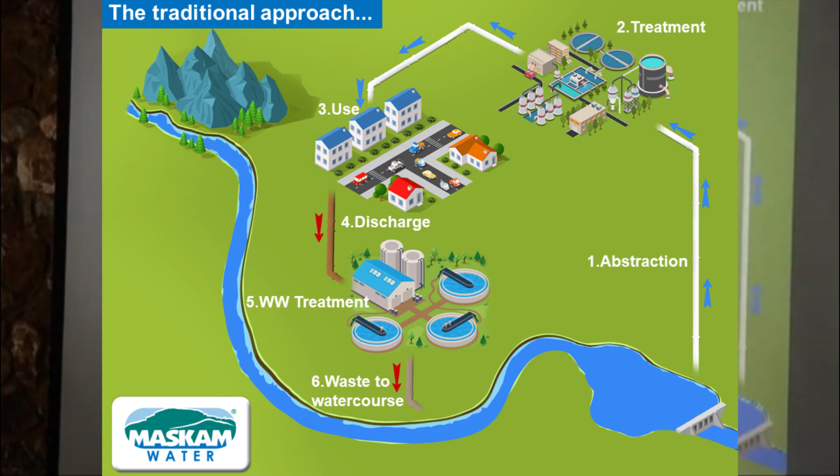Let me show you something. First of all, let's look at our water cycle. We have our catchment area, which normally the water ends up in a dam somewhere. We abstract from that dam, we put it through a filtration system, we use it, we discharge it through an overloaded municipal wastewater treatment works, and we pollute our water course.

Now this is very important. Remember what I said earlier, when you flush it, it's gone, it's out of sight, it's not your problem? Look what's happening here. It's coming back to be your problem because you're feeding it into water courses that feed your drinking water. I do apologize for the sensitive ears, but you're literally pooing in your own drinking water.

When you discharge your wastewater to a non-functional or overloaded municipal wastewater treatment work, you're pooing in your own drinking water. There's no nice way to say it. Okay, now, but in my town it's different because in my town this wastewater system discharged below the dam wall. Oh, beautiful, you just feed it to your neighbor. Come on, where's Ubuntu here? That's what we end up doing.

At a previous meeting I said, okay, everybody by a show of hands who believes eating healthy is good. And just about everybody put up their hands, and the next thing I asked is, who likes some nice grapes every now and again? And everybody put up their hands again. I said, now you think if you flush a problem in Gauteng, it's going to go down the Vaal River, it's not your problem? Guess what?

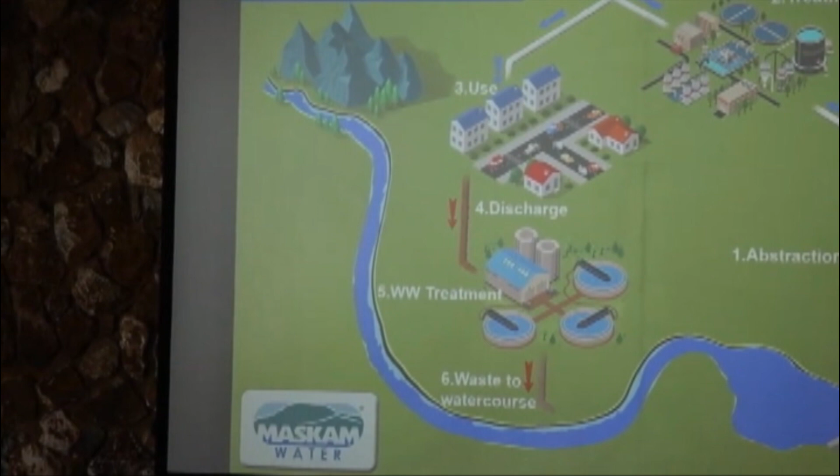But there's another little problem here. The other problem is if you look at the carbon footprint. Again, not many people think that water has a carbon footprint, okay? It's a natural thing. How can that have a carbon footprint? Would you agree? Well, the problem is, if you're in Pretoria and you get water from the Vaal Dam, what's the figure? About 60% of Pretoria's water coming from the Vaal, I think.

Well, if you look there, that's 124 kilometers line of sight. So you're looking at about 150, 200 kilometers of pipeline that you need to pump that water. But your problem is from here to there is a 300-meter rise. You need 30 bars of pressure to lift the water to Joburg before you can flow it down to Pretoria. 30 bars of pressure, to give you an idea, your irrigation system at home runs on 3 bars. Your average geyser runs at 4 bars.

We're talking 30 bars here to lift that water to Joburg before you can get it to Pretoria. What is your carbon footprint on that pipeline? What is your carbon footprint on those pumps? What's your carbon footprint on the electricity that you use for that? Now we're not even talking purification and all the other stuff that goes with it. So your cost and your carbon footprint becomes huge in cases like this.

So what we now do is we start thinking a little bit different. When we do on-site reuse, so whatever wastewater we have here, we treat on-site, we take it back. We now start talking about increased water resilience. And remember, every time you flush a toilet and you treat it, you have water to flush the toilet again, no matter whether the municipal water is on or off.

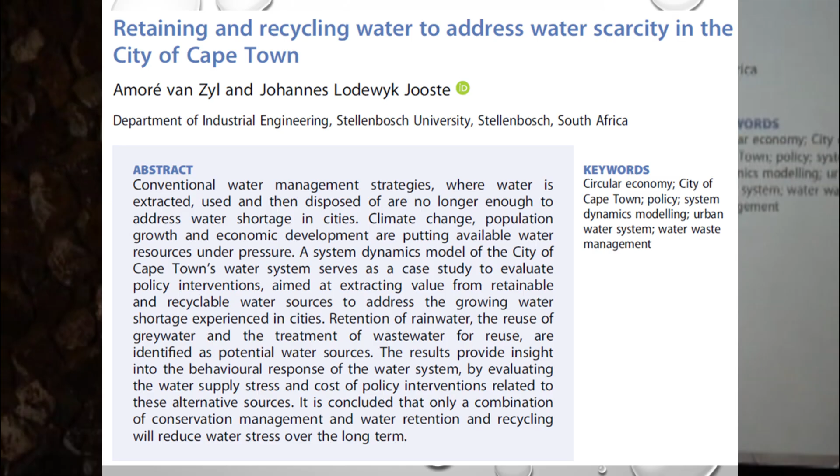In 2020, the University of Stellenbosch, and I'm not going to try to give you all the details, but in 2020, the University of Stellenbosch said, retaining and recycling water to address water scarcity in the city of Cape Town. They looked at all possible water sources taking Cape Town into the future. They excluded desalination because of the cost.

And there's this whole document. If anybody wants it, we can email it to you, talking about the benefits and how you can move forward and how recycling will save the day and for Cape Town become a water source for the future. Exactly the same thing applies here.

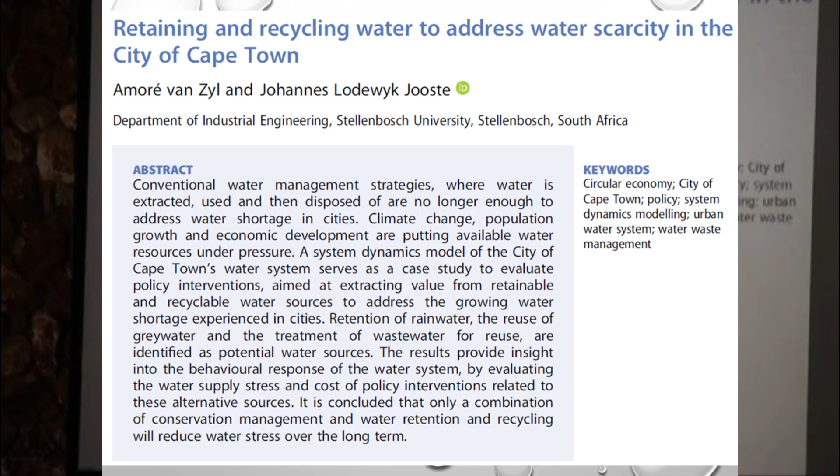I'm going to show you one technology. There's not enough time to go through different technologies. Yes, it is our technology. I'm a little bit biased here, okay? The fusion system, which is an underground installed wastewater treatment plant. And it will recycle your water on site for you.

Comes standard with a panel that has an early warning system. So if anything goes wrong with the system, it will immediately warn you before you have a pollution problem. And these early warning systems, I think, are critical. Because something can go wrong, it's man-made. But you need to know when things go wrong.

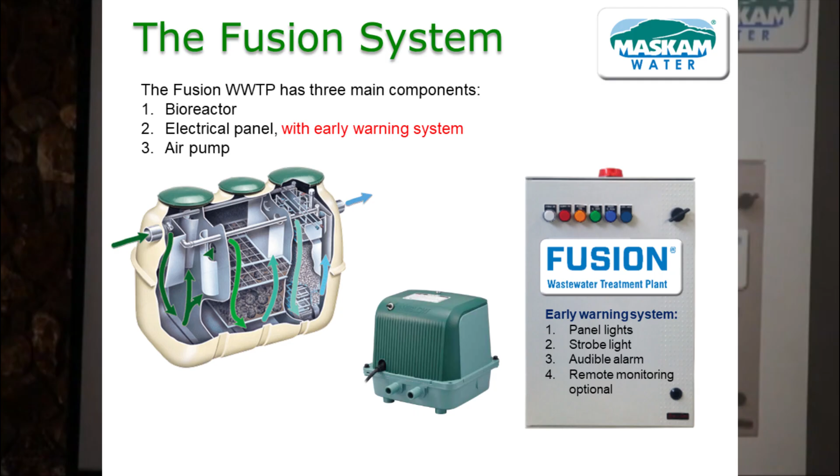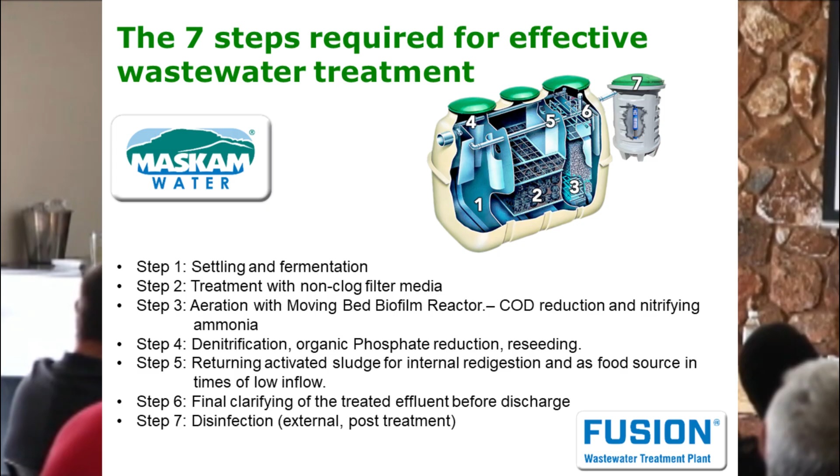These 7 steps, I'm not going through them in detail. I can tell you that quite a number of wastewater treatment plants in South Africa, I almost want to say 90% of the small plants, stop at stage number 3. These stages are missing. And you can take it with anything, even if you bake something at home, take out half your ingredients of the recipe and see if that recipe is going to work. There's certain things that are needed for a wastewater treatment plant to work.

So before you look at the price, because that's what most people do, look at what you get for the price. Because I've seen that so often. People buying cheap and then having to remove it again later. I'm not going to spend time on the technical side of it.

Just keep in mind, without disinfection, there are at least 6 steps of treatment that need to happen to get to the water quality that by law you need to get to if you want to use or discharge this water. Okay? But at the same time, again, for pollution, otherwise you end up pooing again in your drinking water. Case studies.

Where do you think is the highest risk installation you can have in terms of if your system fails, you will have big problems? Where do you think is the highest risk installation? Let me see if I can get 2 or 3 people to answer that question for me. No, you're not allowed to. You know the answer. Come on. You know the answer too, Nora, you're not allowed to answer. And so does Andries and Arno. I'm listening, sir. Close to any natural water system, yes. But if you step it up a bit more, where's the highest risk?

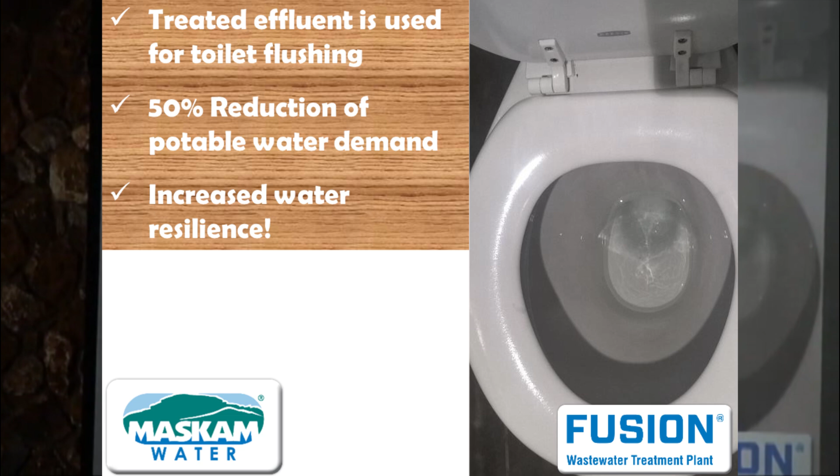And we've cut the water demand by 50%. Remember I said for domestic toilet flush is about 30%. Here we're talking about the commercial building where toilet flush can be up to 90%. In this case it's 50% because they have showers and stuff as well. So you've just cut your water bill by half. But you have water resilience, you always have toilet flush water.

For 6 years going now, I think the case study speaks for itself. You can do it in the city, you can make a positive difference. And that's why today's theme is talking solutions, because we hear so much about the problems out in the media already. Let's talk solutions.

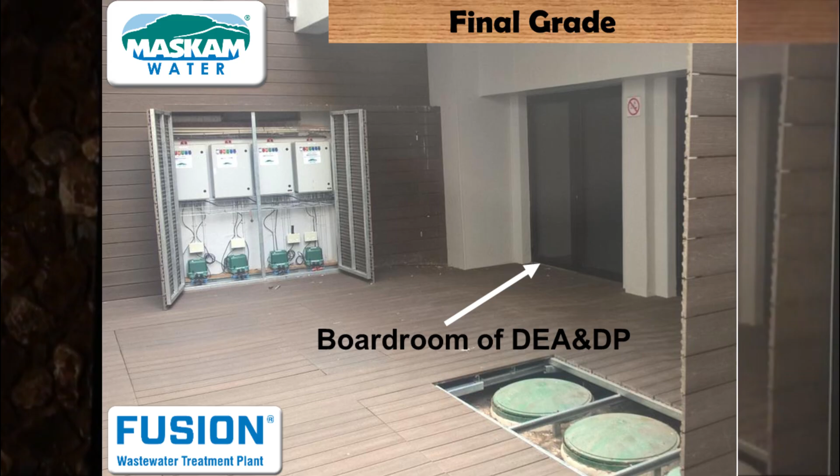This is on a small building. You can see how nicely it blends in with the gardens. There's your treated effluent again. Your air pump. Now the air pump, going back a little bit, there's your air pumps there that's supplying. We had to put in 4 small plants because we physically had to carry them through the building. We couldn't put one big plant in because it just wouldn't fit. But that again is the beauty of having a Lego set. You can pick what's needed. So hiding that air pump there in the garden, we use the false rock.

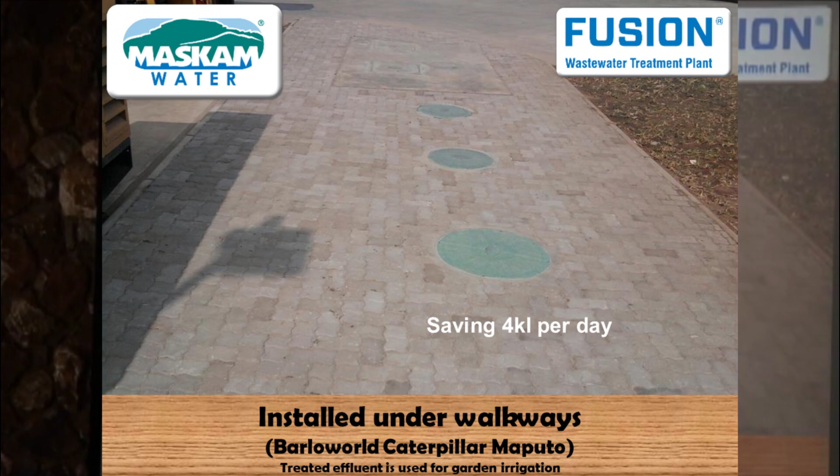In the walkway, in the paving, if you want to drive over it, you've got to do a proper slab. I know Dries has done one where people drive over it in the driveway feeding to a hotel. Unfortunately, Dries, I don't have that photo in the slideshow, but that is also possible. Hospitality industry feeds into the fusion. They use the water for irrigation purposes. There is farms, houses at the farms.

Curro School, Bloemfontein. Again, you can see the treated effluent. They're using that for the sports field irrigation. But the beauty, now we start talking modular systems, because this was designed for a school having a maximum of 600 learners. So then the school grew, they're just over 800 learners now, so the wastewater treatment plant is too small. Oh, big problem. Nope.

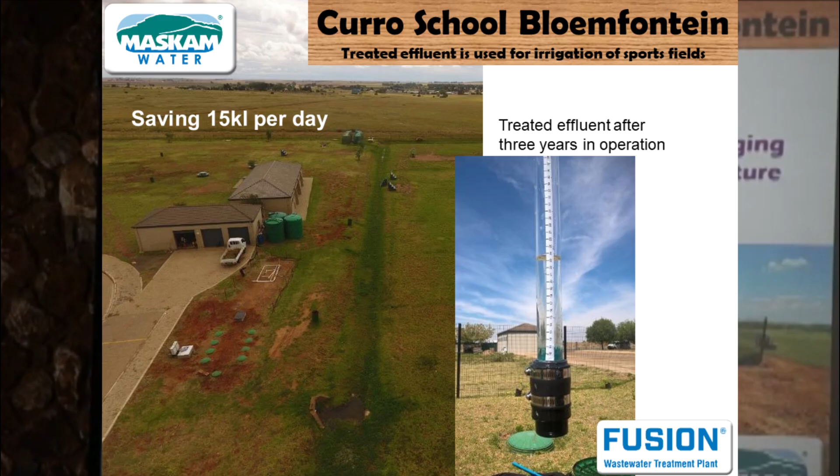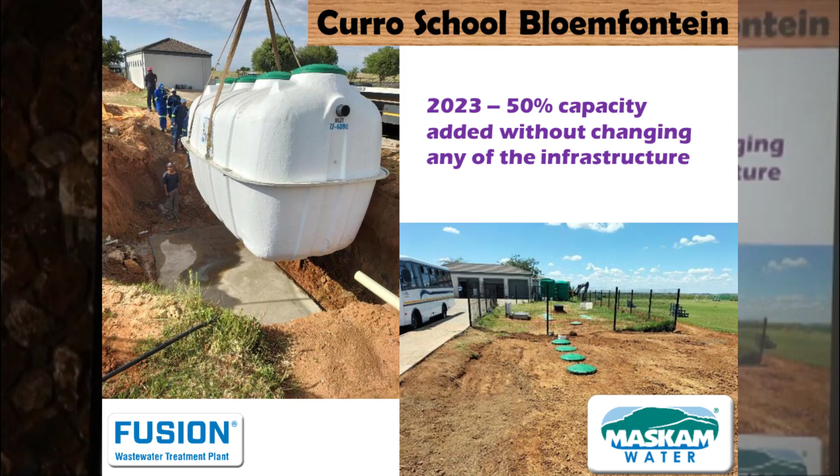We just dropped in number 3. And now they can go up to 900 learners. When they go above 900, we drop in number 4. And so we can expand as the demand of the site expands. Isn't that beautiful? These are mostly Dries installations.

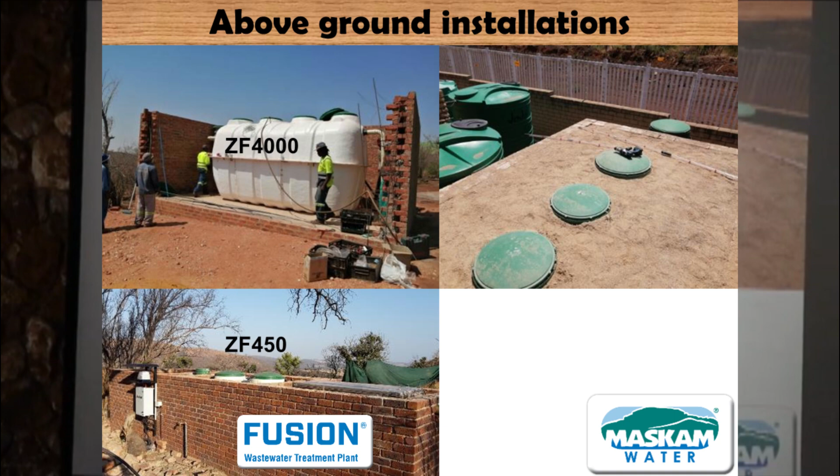They've been doing this in Gauteng since 2012. So these are all installations that Dries have done above ground. Some of them are in Mpumalanga, some are here, not very far from here in fact.

Then if we look at bigger developments, this one is in Katima Mulilo, Namibia. Each color is a different phase. So there is phase 1 coming in. They've got 2 phases up and running now. These ones are now up and running, and these phases will still come in.

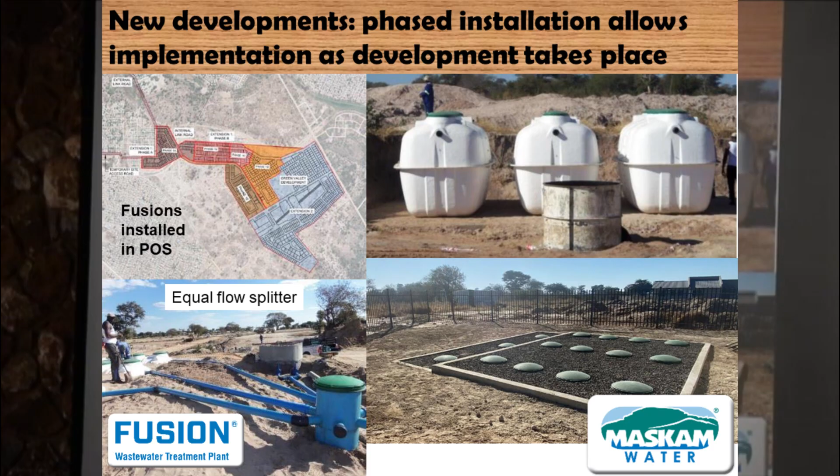So even within the development, rather than having a central sewer system at a huge cost and pumping stations, because it's relatively flat there, they decentralize within the development, and each phase will get their own set of treatment plants, and they will reuse the water in that phase for irrigation purposes. What a beauty. You literally do clusters as you move along. There you can see the final grade of the system.

This one we did phase 1 in November last year. You can see many more phases to come. Again, this is in KZN, it's typically hilly areas. The EIA experts will now tell you what a nightmare that becomes in terms of, well, some will make a lot of money, so for them it's not a nightmare, but every time you have a waterway crossing or a catchment crossing, the EIAs you need to go through, and the pumping stations to pump it up 50 meters or 100 meters. So in this case, it will be fully decentralized.

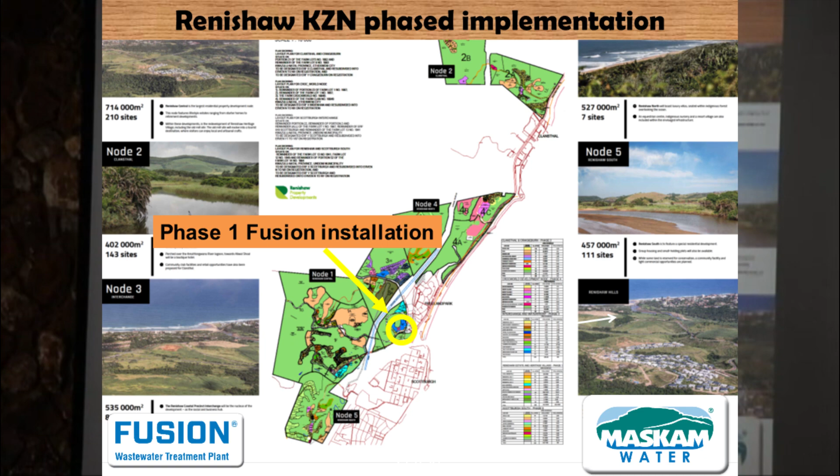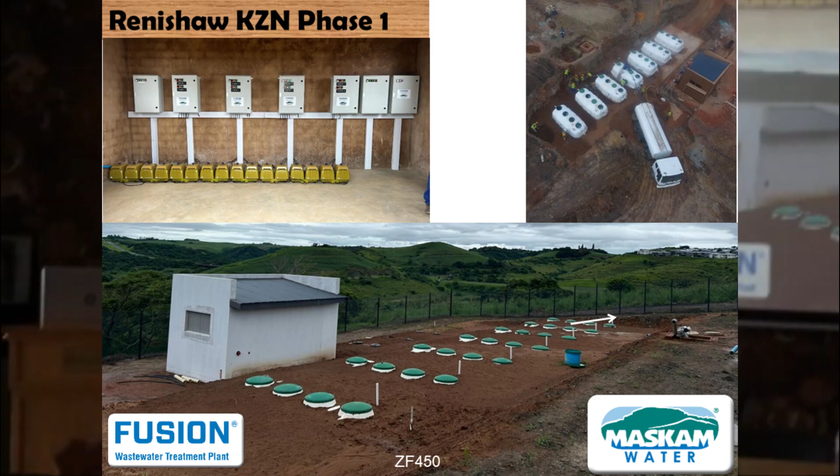In the case of a domestic setup, this will serve 140 houses. It uses 2.5 kilowatts per hour. That's nothing. For 140 houses, 2.5 kilowatts per hour, that's just for the treatment, it excludes pumping back and so forth. It's out of sight, fits in very nicely with your landscape. There are a few more projects like that coming up, and in future we will have some more to show on that. There you can see the 7 tanks during the installation period.

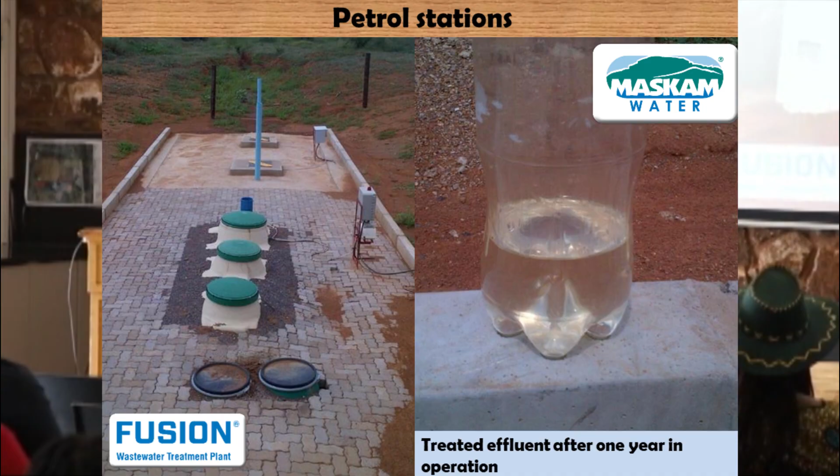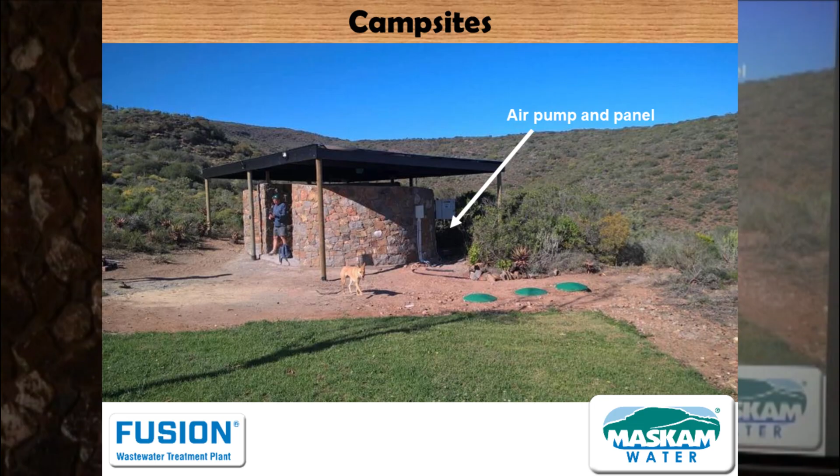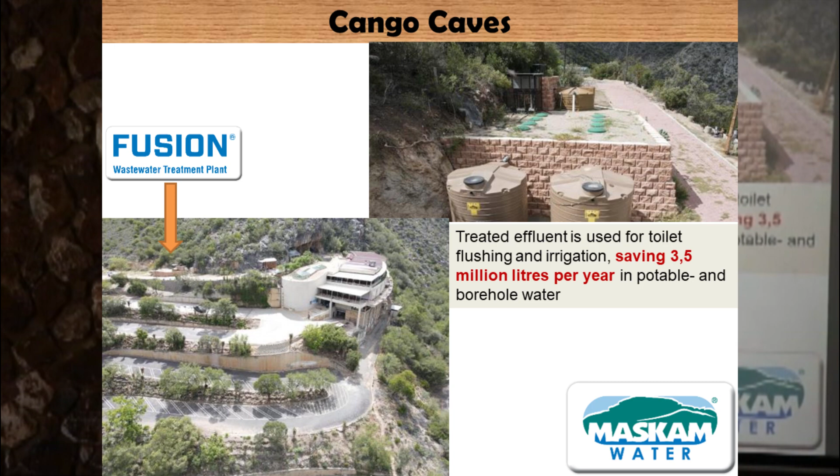Cango Caves making use of this technology, where they pump their wastewater up to that point. It gravity feeds to a lifting station here. They pump it up, treat it, pump it higher up on the mountain and bring it back for toilet flushing and for irrigation. Vrolijkheid Nature Reserve, De Hoop Nature Reserve, when you go on the whale trail, you will have your Fusions there treating your wastewater. There are more nature reserves. There's a botanical garden, a few others as well. We cannot do all of them.

So the case studies are just to show you it is possible in just about any location. Different technologies are better suited for certain locations, but you can do it anyway, and you can recycle 100% of your water for non-drinking. If you want to take it to drinking purposes, then you go through a reverse osmosis system. You will have, depending on the system that you use, anywhere between 25 and 45% waste. So there you do lose water. But it also becomes more expensive.

We are busy with a case now where there is no drinking water. There's no municipal supply. The boreholes can only deliver 8% of the total volume needed. Rainwater harvesting is difficult. It's going to be done, but for 3 months of the year there is no rain. So the only option left is that we take treated effluent back to drinking water standards, and then blend it in with the rainwater and the boreholes to be the total answer. So it's doable, but it is your more expensive solution. Your cheap solution is to use that for non-drinking purposes and save your expensive water for drinking, for showering, for human contact.

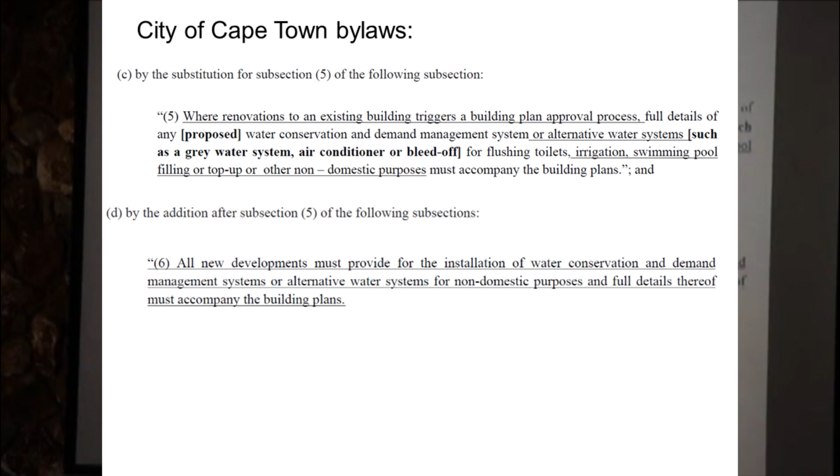City of Cape Town already in 2018 bylaws said renovations and new developments must make use of water conservation and demand management systems or alternative water systems for non-drinking purposes. It's already by law in Cape Town. And I stand to be corrected, but I believe that Ekurhuleni is also coming to a point where they said new developments must do their own wastewater treatment because they can't do it anymore. So these things are changing. Municipalities used to resist this. They don't really have an option now but to adopt this.

Green Cape has done a study also in 2020 promoting on-site treatment and reuse. I may be in trouble for what I'm going to say now, but I'm not known to be scared of trouble. Green Cape, their purpose is to promote green technology. Started up and funded by the Western Cape government and City of Cape Town. Now these are private funders as well. I couldn't quite get Green Cape to buy into this thing. They did a lot of other green stuff, but this wastewater recycling thing, they didn't like that idea. Until I went to show them the case study at Department of Environmental Affairs. 3 months later, they issued this paper, because then they saw in proof what is possible.

Another study by them was the Cango Caves. You can read up on it on the website. They actually give you the numbers. And this is the first property where we did on-site wastewater treatment, August of 2010. The beauty is they're moving that house now. They've broken it down last year, they're moving it. They're taking out the Fusion, they're moving it with. So there's some green material.

Also going to the Solar Impulse Foundation. There's only 2 companies in Africa that are listed with the Solar Impulse. This is one of them. And to list there's a set of criteria, and one of them is you must already be in commercial operation. It's not a trial or a design or a test phase, it must already be commercially accepted.

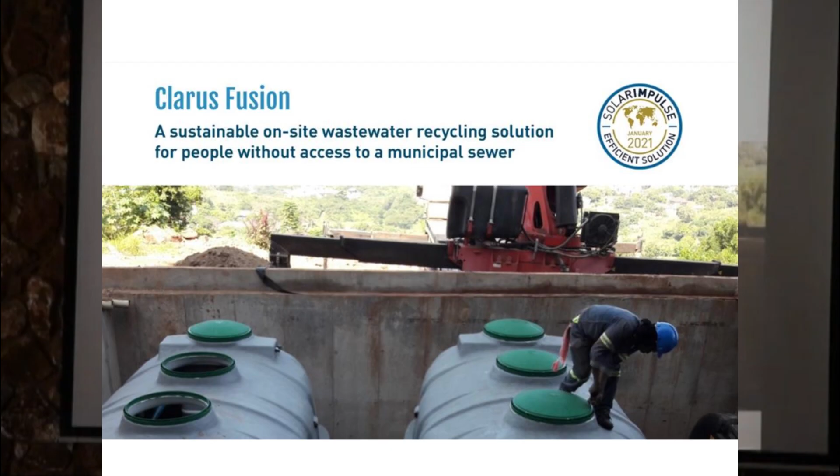Then when we look at on-site wastewater, I'm not going to spend time on that, but we speak to 13 of the 17 SDGs. Not all 13 necessarily on the same site, but we speak to 13 of the 17 SDGs. Now, to all the corporates sitting here and all the consultants to corporates, if you want to increase your SDG score, have a look at this. This is a way to do it.

Now, you can take it one step further. If you're corporate, you need to spend your corporate responsibilities. You need to spend money in the communities. When you spend money in the community, you start talking about no poverty, because people can use the water to grow food. You talk about zero hunger. You talk about gender equality. You talk about health. How do you talk about health when you're talking wastewater? It's very simple. Kids don't play in sewage contaminated soil anymore because you give them proper sanitation.

So when you fund something like this for a community, you score SDGs, but you also have your points for your community responsibility. So it's a double win yet again. And lastly, this is specific to our company. If you look at partnerships, the way we do it is we partner with local installers and local maintenance people. So we create local wealth, build a local economy. And that's where the partnerships come in.

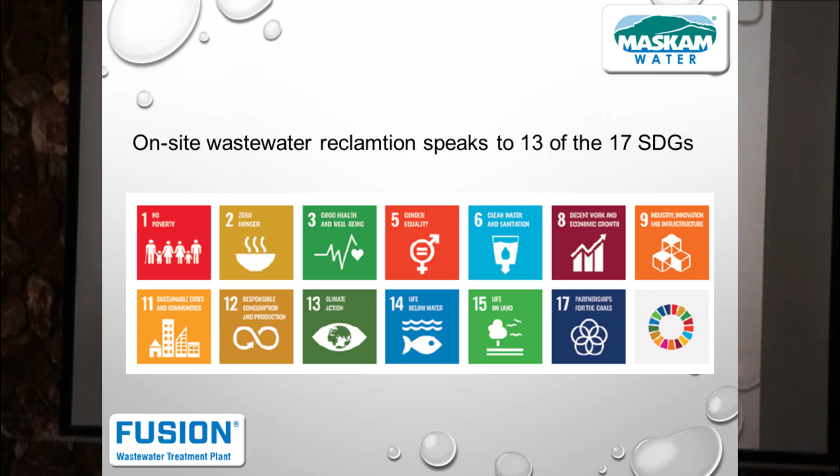For those of you who say, yes, I'd like to do this, but it's too expensive, I don't have 100 or 200 or 5 million, whatever the case may be, to spend on this intervention, it can be financed. We're working with Capital Box there. So you can finance it, and your saving in buying water can carry your installment. So you're cash flow neutral until your investment is paid off, and then you're cash flow positive. So you can get involved in this intervention without having to fork out the big money that you don't have.

There is also a possibility of rentals. That's a bit more strict, but we have companies that don't want to buy the equipment, they don't want it on their books, but they will rather have the operational expense of a rental. It is also possible through the financing model.

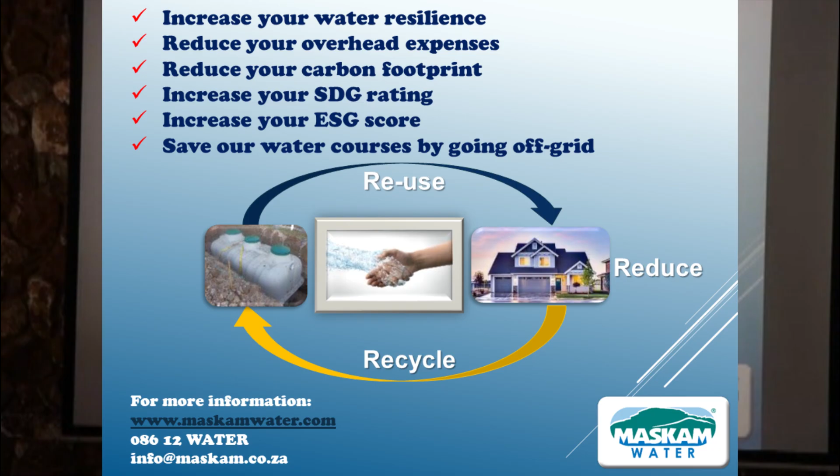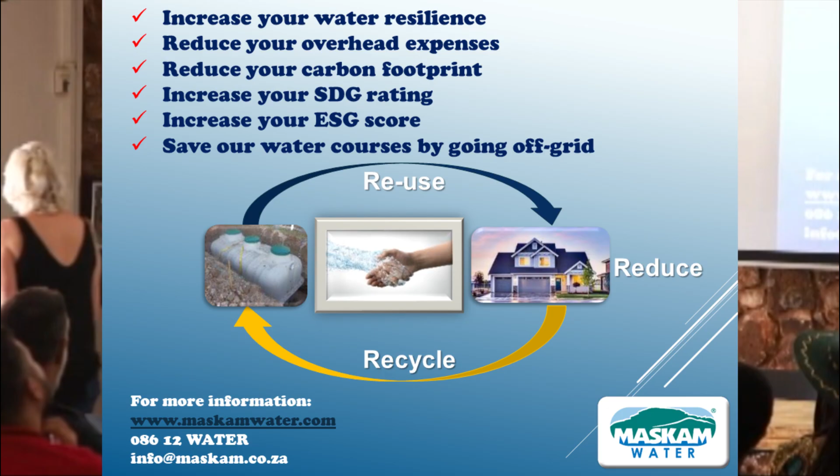So ladies and gentlemen, with that, I want to say on-site recycling will increase your water resilience. It will reduce your overhead expenses in not buying water, or buying less water at least. It will reduce your carbon footprint, increase your sustainable development rating. It will increase your ESG score because for E, environmental, you need to drop your water consumption by 20%. You can do it with this. So you can score on your ESG. And you save our water courses, which Darren will love.